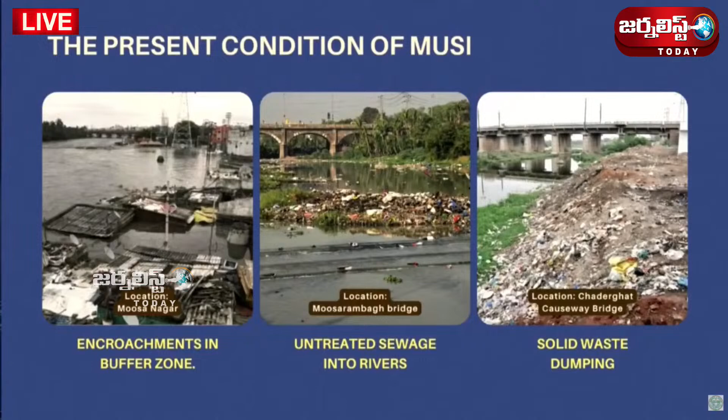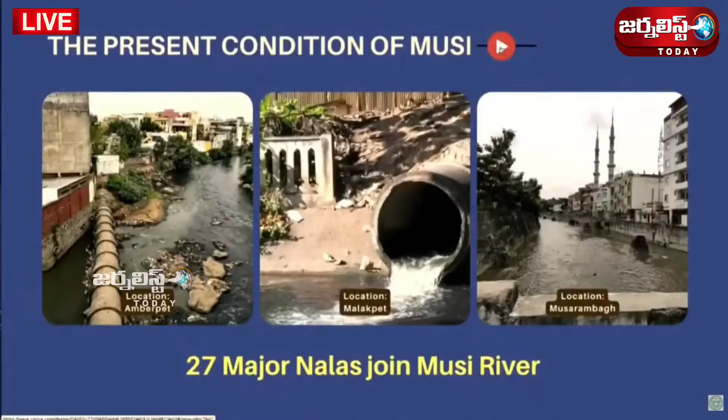At Amberpet, I have taken some examples to show this. At Malakpet and Musarambagh, there are 27 major nalas, not counting smaller ones, that join the Musi river without treatment. Treatment started some years back, but a lot still needs to be done.

I would also like to show a video here. The reality of the Musi. This is not just a river.

Across Hyderabad, drainage channels discharge directly into the Musi, carrying untreated sewage every day. Plastic waste and toxic dumping have turned sections of the river into polluted drains. Chemical pollutants create thick layers of foam, a visible sign of contamination. Encroachments and unmanaged waste continue to choke the river's natural flow. What was once a flowing river now struggles under the weight of pollution. The Musi carries the waste of a growing city. Its condition today is a reminder that urgent action is needed.

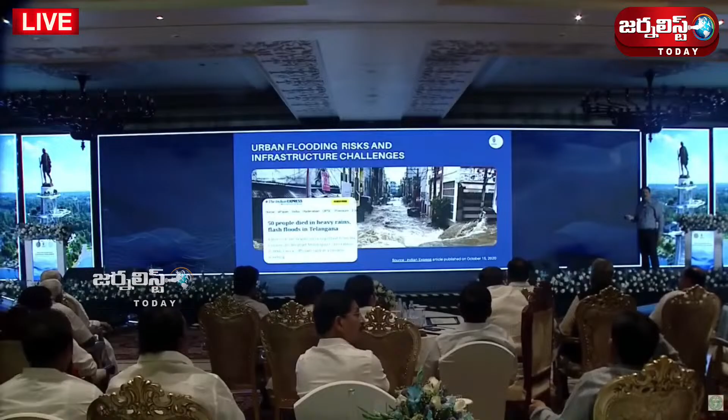This is the urgency we face today. Looking at historical paper clippings, in 2020, 50 people died in heavy rains and flash floods in Telangana. What is the reason for this? Because Musi has to take all the nalas into it. Whatever flood comes has to merge into the Musi and flow uninterrupted. But if that is not happening, then flooding occurs. This is called urban flooding.

In urban flooding, there are risks and infrastructure challenges too. This happened in 2025: two dead, two missing in rain-related incidents, parts of the city waterlogged, complete city waterlogged, and over 1,000 families had to be displaced. Heavy rain pounded Hyderabad, this location is Shankar Nagar in 2020, and this is a 2025 news item.

Hyderabad. Musi River overflowing, houses up. Hyderabad battered by intense rainfall, plunging the city once again into chaos. Police moved quickly to close roads around the affected zone. Hyderabad was severely impacted as heavy rain continued to hit the city and several other districts of Telangana, leading to flight diversions and traffic congestion. The old city faces severe flooding, forcing hundreds to evacuate. Death toll has now gone up to 34. Forces have also joined the rescue operations to safely evacuate residents.

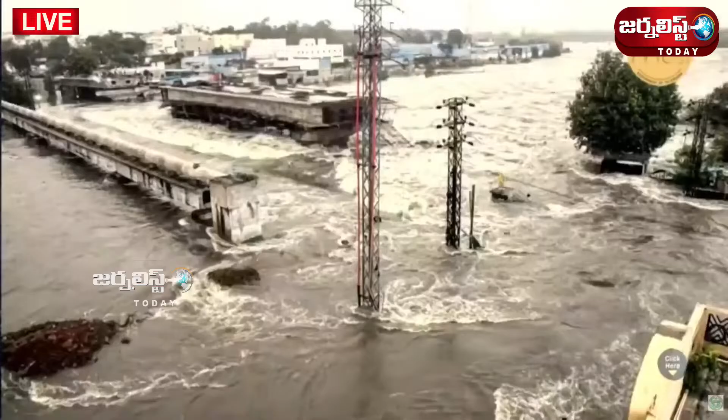Recent floods, 2025. This is how much havoc the heavy rains are causing in Hyderabad.

Though we have the river to take all this flood water along its course, passing through to the Krishna river and then to the sea, because of various obstructions and other issues, this is not happening. That is the crisis.

Added to this, there is also climate change. We have seen within 24 hours, 25 centimeters of rain, even 40 centimeters of rain. All the systems were prepared only for 2 to 10 centimeters maximum. Even if 10 centimeters happens, the entire city gets into waterlogging, not only here but across other cities around the world too. But what needs to be done?

When we talk about Musi, the Musi project is not looking only at cleaning the river. We are trying to do an integrated, comprehensive approach for the entire city. In the coming slides, I will explain exactly what the government is trying to do.

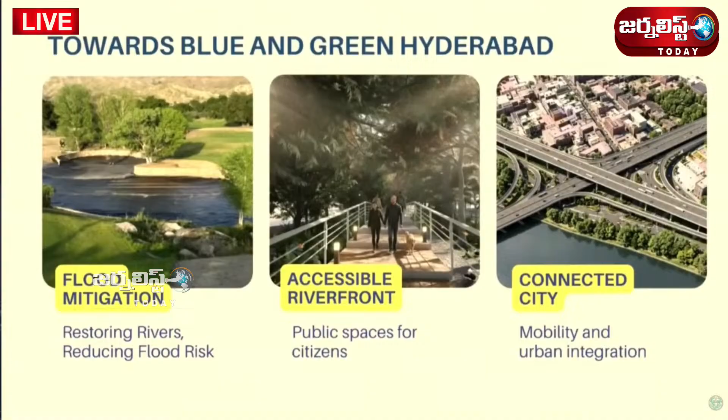See, the river is there, how to connect it. So mobility is also another factor that is considered in this project.

And sustainable development - every development that is taken up has to be sustainable. These days we are talking global SDGs. With this river, at least we are attempting to achieve 6 sustainable development goals.

This is exactly what it is. And we have a very rich heritage. Probably some of you might have seen what we tried to show from Vishnu Kundin to the present day, how history has shaped up and given invaluable heritage to Hyderabad. We have to restore and protect it.

And the most important thing is, with all these things, you have seen the videos of Tokyo, Singapore and London - in every city, the economy thrives next to the river. Night economy exists there too. So why not we have this, so that people can also work at night. Blue collar jobs will come and they will earn very good amounts to improve their livelihoods.

Then we have also done some analysis and compared with other rivers. In Seoul, the Cheonggyecheon river is developed only 5.8 kilometers - that's only what we have seen. And Sabarmati riverfront in phase 1, they have done 11.5 kilometers. In phase 2 now they are doing 13 kilometers.

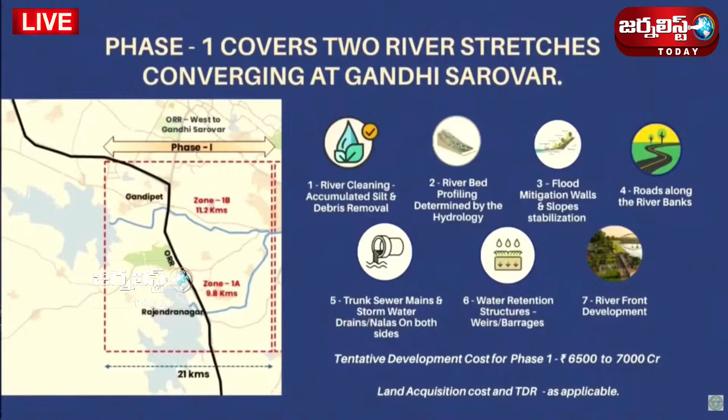And this is why in the next slides you will understand what buffer is, why it is required, etc. So understanding the river is very, very important. Unless you understand the river, what is the flow of the river, you cannot plan it. It is haphazard planning and it cannot sustain. When we talk about sustainability, we have to understand the science, safety and hydrology of the river.

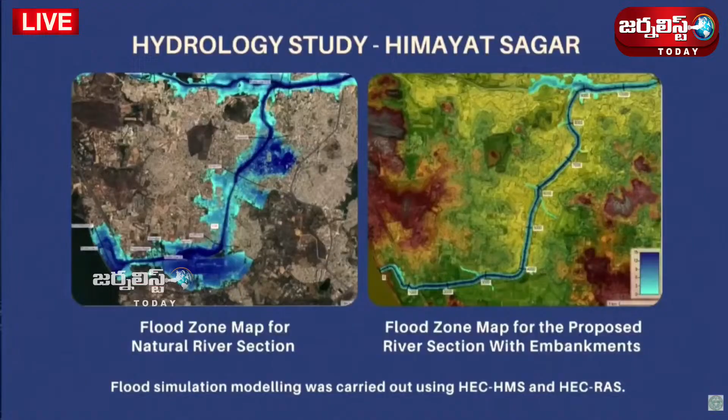This modeling shows that, after this, we have arrived at this section, and this entire flow. This is for the Himayat Sagar stretch from Himayat Sagar to the Bapughat, that is the Gandhi Sarovar. Up to that, after study, this is 1.53 lakh cusecs of water. In 2025, the maximum flow we have taken from Himayat Sagar was only 36,000 cusecs, but this Himayat Sagar was designed for 1.53 lakh cusecs.

Unless we see the downstream of the river properly and do the section, again the floods will happen. That's the reason we have taken National Institute of Hydrology, Roorkee also on board, and they have vetted and certified it. Based on that, from the middle of the river, on both sides, if we maintain 100 meters including the buffer, the river will flow like this. The river will flow at 1 in 5 years or 1 in 25 years - this is called the return period, as per the technical term.

This takes about 60,000 cusecs. So whatever flood happened in 2025, 2020, etc. can be arrested here only.

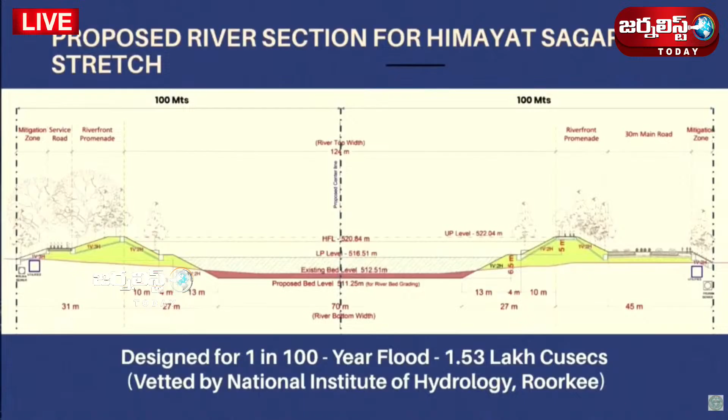On this buffer, the promenades are coming. This is called the lower promenade, this is the upper promenade. On one side, within the buffer zone, we will have a 6-lane, 30-meter main road, and on the other side, only the service road with 9 meters. Rest of it will be, most of it, open spaces for the public.

We have also done this for the second stretch. Of course, we have done it for the entire Musi, but I am just trying to show only these two stretches in phase 1. This is a hydrology study for Osman Sagar up to Gandhi Sarovar. Here also you can see how the flood plain is, and after the section how it will be. The section of this area is, the bottom width is 70 meters and the full flood level is 108 meters.

This one, and rest of it is the same from the middle. We will be taking 100 meters on both sides. So complete within 200 meters, 1 in 100-year flood is 26,300, but it can take easily 60,000 cusecs. Even if cloud bursts are happening, climate change causes are there, this will still take the entire flow.

Only in the river, it will not spill over into the floodplain, not causing any damage. So this is how the section will be. We will be having a toe wall constructed, and slopes will be created so that the speed of the river cannot be obstructed - the river will flow. This is the lower promenade, and this is the upper promenade. On the upper promenade, see, if you see here, this is the lower promenade. On the upper promenade, this slant, we will go for greenery or different combinations.

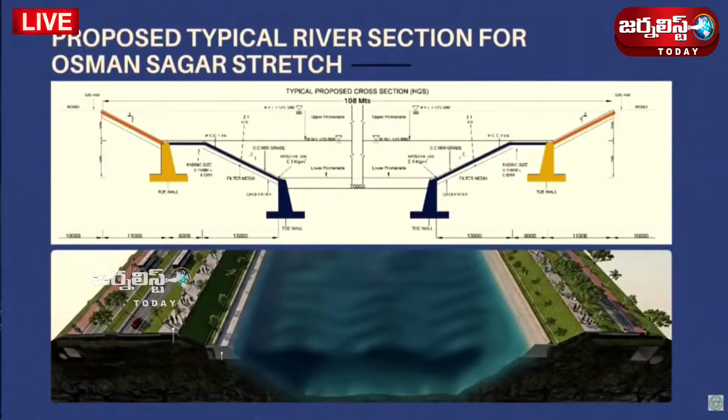We can also use Gabion structures wherever needed, if the speed is required - if the slant slopes are not withstanding, we have to go with CC. But we have worked this out for every 30 meters.

Why are we talking about the buffer? It is not the state's thing, but it is the Central Water Commission, Ministry of Jal Shakti, which says how the river has to be protected, what needs to be done. If you see this graph, that is exactly what it says. This is the 1 in 5 year return period flood. It is a protected area. When we say protected area, there is no construction allowed. This is the river bed.

So in the riverbed, no construction is allowed. Then there's the 1 in 25 year return period, that is called the regulatory area. This regulatory area, in fact, is the buffer zone, including a part of the 100-year return period also. So this is how the section of the river has to be decided.

That's how the Telangana government decided in 2012. GO 168 clearly says 50-meter buffer for the river in municipal corporation areas, and it was reiterated in 2016 by GO 7, which is 50 meters buffer on both sides of the river. This is very clear in GO 7.

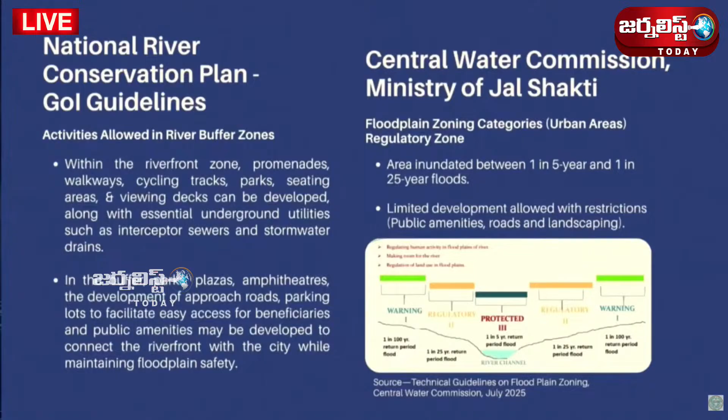People can also refer to the guidelines. The source is the Technical Guidelines on Floodplain Zoning, Central Water Commission, again issued in July 2025, based on various Supreme Court orders, NGT orders, and all these things. I request all of you, please do study that.

So then we are coming to how the river will be cleaned. One option is completely cleaning it, but that is not possible because there will be some toxins and other things. When we have to disturb them, we have to disturb them in a proper condition. But it can happen over a period of time if we substitute that water with fresh surface water.

For this, a project has already been taken up by the government. If you can see, this is the Godavari linkage that is coming all along the ORR and coming to Osman Sagar and then Himayat Sagar. Total 20 TMC of water is allotted, and work has already started under the Hyderabad Metro Water Supply and Sewerage Board. Out of this, exclusively 2.5 TMC of water is allocated for Musi rejuvenation.

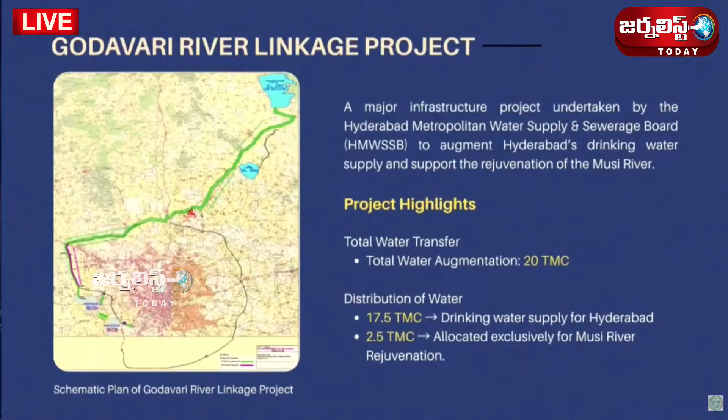This is exactly what I was trying to tell you. So in the river, all through 365 days, there will be water, the fresh water that comes from the river Godavari. This is the river linking project that the special CS was also mentioning. So this is one part, getting the fresh water there.

Then what is the second thing? The second thing is we have to treat the sewage in the entire city. Sewage treatment and trunk sewer mains. After treating, or before treating, we should not allow the sewage to pass into the river. So what exactly is now happening on the sewage front? This is another very important thing.

If you see, there are STPs already existing. Here is a representative photo of an already functional one, at Amberpet. 772 MLD of existing STPs, 25 in number. And 1106 MLD already commissioned, with works going on at good pace, 27 in number. 972 MLD of ongoing STPs under the Amrut scheme, 39 under progress. So these many STPs are happening, and this is the existing one.

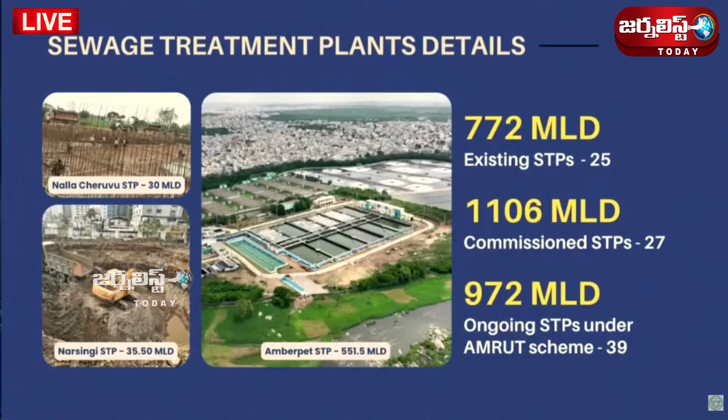These are the new ones, construction is already going on. In phase 1, the Narsingi STP has already started work. What remains to be done?

What remains to be done is taking the nalas into consideration. Along the Musi, we have to have the diversion drains, and these are bigger ones. The red ones are the existing STPs. If we are not doing another big STP, we have to divert it here and bring it here likewise.

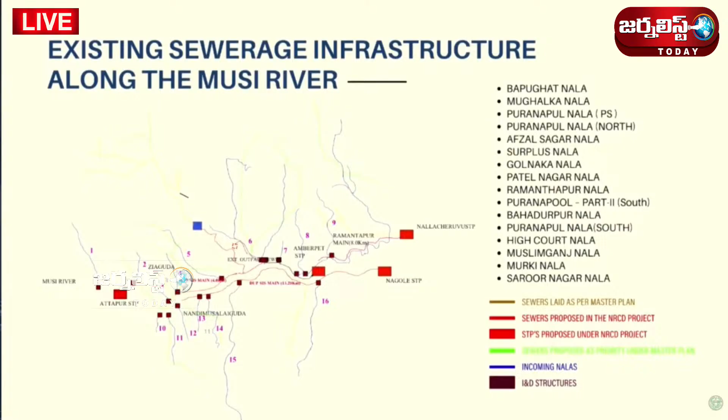And this is the part of the project where we were talking about phase 1, the sewage treatment and the trunk mains are all happening here. This is the picture showing how the trunk mains are coming, how the sewage will be diverted to the STP. Here is one STP, here is another, and another. There are 4 STPs nearby. This is treated and coming and joining the river.

But even after that, we have to address the other side too, because this is treated and merging. For the other side, it will come and go to Attapur. For the first time in Hyderabad, we are coming out with one underground STP as well. So the red marks are the trunk mains that lead to the STP, and this is connected.

Here I would like to just bring to the notice of the August House: earlier also, diversion lanes were constructed, if you see the yellow line, that is exactly in the Musi.

So if we construct something in the river itself, it will obstruct the flow of the river. So what we are doing as part of the project, we are shifting this onto the river edge, into the buffer, so that the river gets what it is supposed to be having.

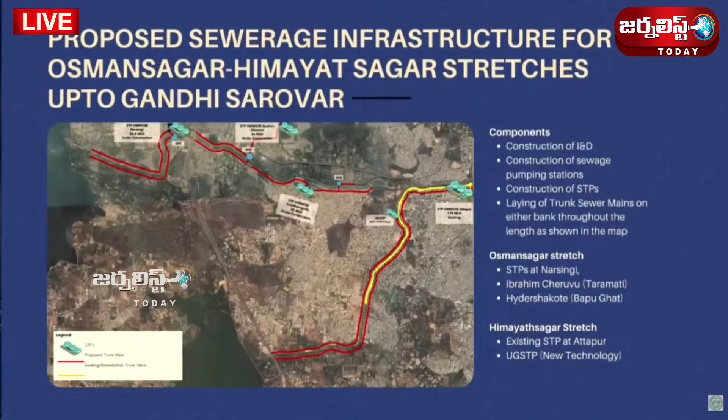Another very big decision taken by the Honorable Chief Minister and the Cabinet Government is that we are planning to have the STPs fully functional, diverting all the sewage into the STPs and treating it. Why not treat it tertiarily? The tertiary treatment has to happen.

Then use that water. We are bringing Godavari water and Krishna water, over 200 plus 300 plus kilometers, spending so much money, and that is for drinking water purpose, whereas the sewage is just left like that. If you see the Singapore model, they call it NEWater, treated sewage water utilized for various purposes. Why not we use it too? That is exactly what the project is talking about. This is also factored now.

After treating this sewage water, tertiary treatment will be done. This water will be supplied to industry, particularly the data centers coming up. Already Metro Water Supply and Sewerage Board is working with TGIIC where industrial areas are coming up, for example Future City and also the Chandanvelly industrial area. A pipeline will be laid.

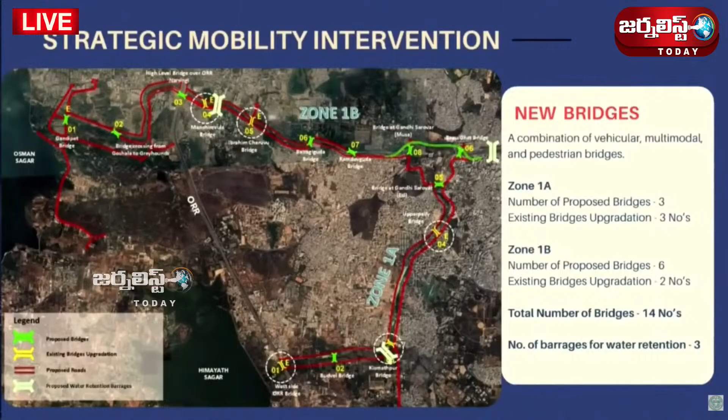Total 14 bridges, out of which about 9 are new proposals and 5 are old upgradations. As you are aware, some of them are low-lying causeways which need to be uplifted, and that is also being taken up under this. The entire costing, as I was showing, is within 6,500 to 7,000 crore.

So this is riverfront and public recreation spaces, as I was talking about how the buffer zone will be used, restoring Musi and reconnecting the people. Musi has to be connected to the people, who are important stakeholders in the entire project.

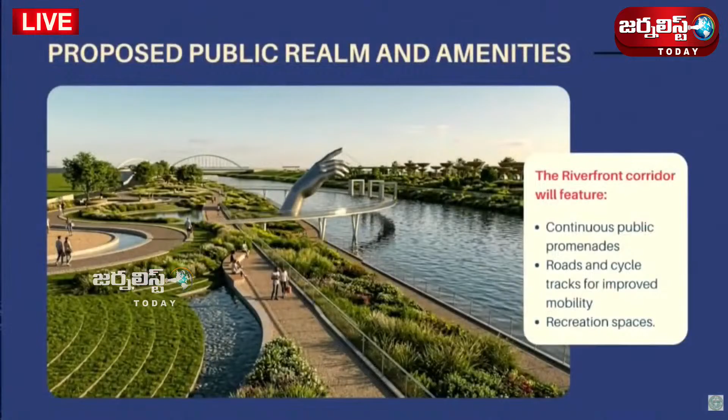See some of the renderings: continuous public promenades, roads and cycle tracks for improved mobility, recreation spaces. This is exactly as per the river section I was talking about; the pictorial proposal shown now is to scale, and the planning has happened as per that only.

These are the public amenities. Please play the video.

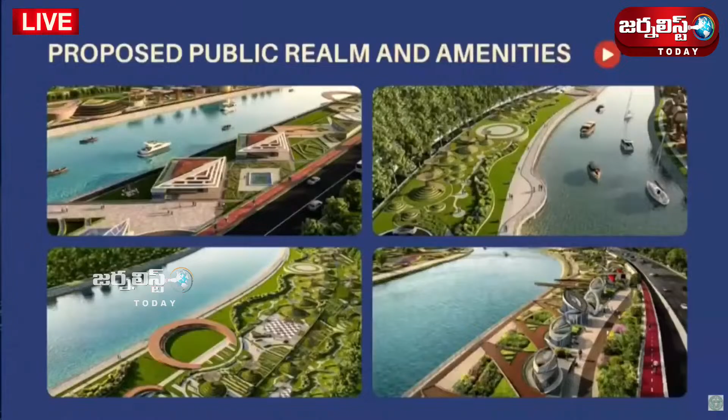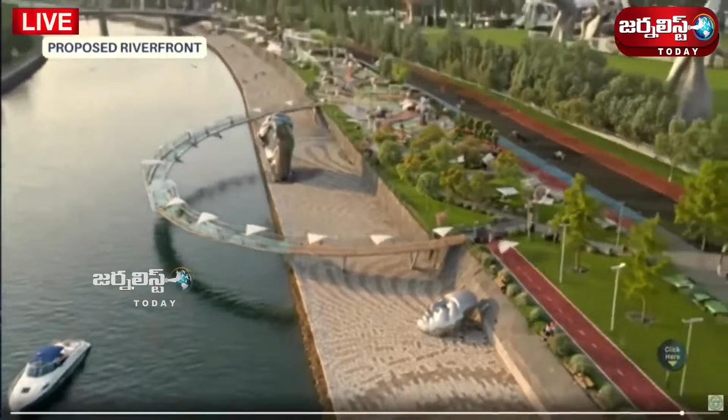So this is how we have envisioned with the technical study. The study happened for 1.5 years. We have gone around and seen every place, and the Honorable Chief Minister himself has seen it, and he has given a lot of inputs into that, and this is exactly how the master planning happened. Now the DPR is also ready for phase 1, and we will be immediately starting.

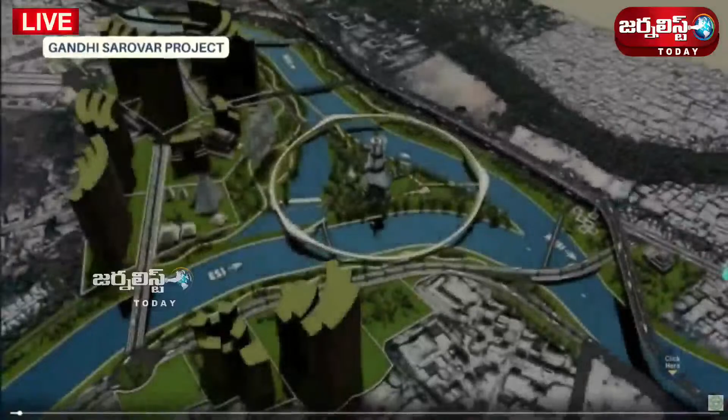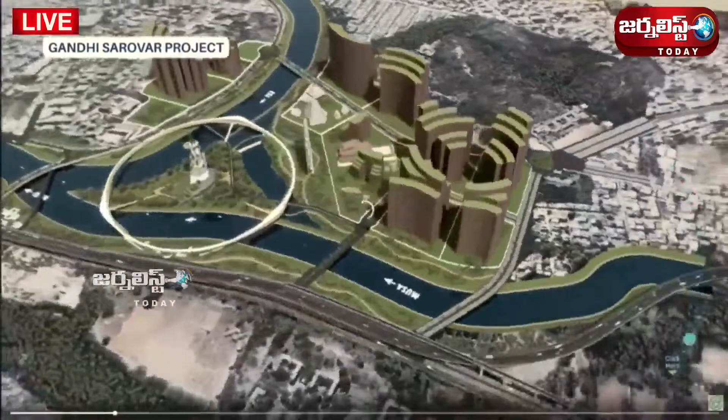వీడియో ప్లీజ్. సౌండ్ తగ్గి.

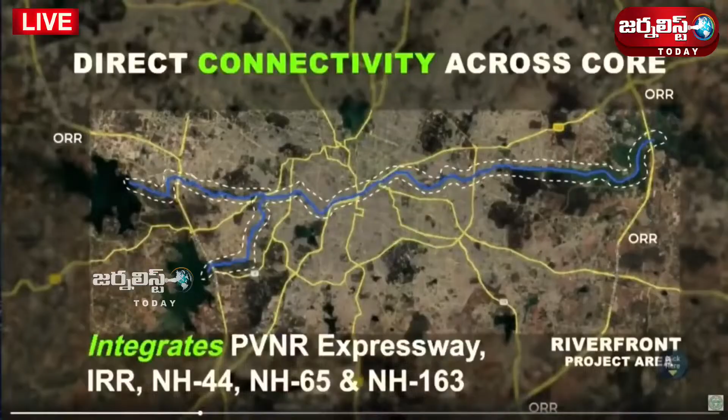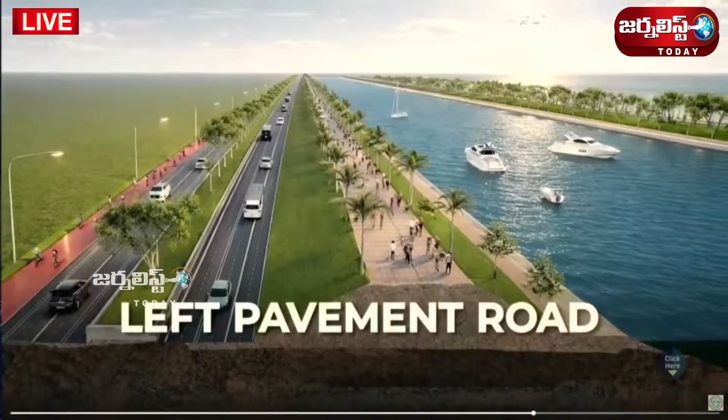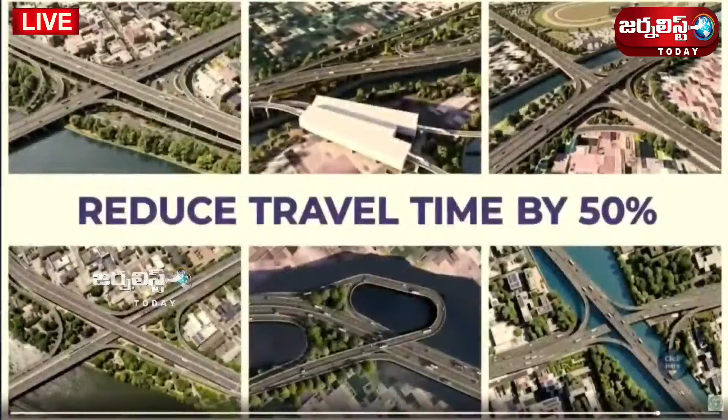This is the left pavement road and this is the right pavement road. This is the Musi cross section. Purana Pool Bridge, this is how the exits are going to come. The previous one was at MGBS over the metro rail. This reduces not only the travel time but, as I said, it is economically viable for the public at large, and this is how it is going to be.

So, exactly this decongestion, mobility, all these things are spoken about in this project. Coming to the next very important thing - as I was telling, our forefathers have given us a great heritage. We have to protect that heritage and take the leeway of that heritage. So, heritage tourism - most of us have visited Italy, France or other European countries. Whenever we go around the monuments and heritage structures, we say wow. But when we have the same thing in Hyderabad, why not improve it? Why not attract global people here? Look at that - these are some of the heritage structures that are there.